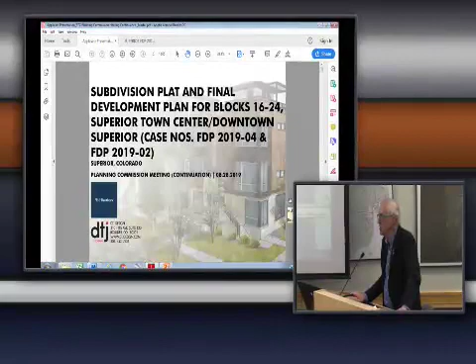Good evening, thank you for having us back again this week. Dave Williams, Principal of DTJ Design, 3101 Iris in Boulder. As Stephen said, we got together last week and had a very productive work session to address the various outstanding items, questions, and issues that you all had identified in the last meeting. I believe Stephen's memo did a really good job of summarizing everything, but I did want to run through things relatively quickly here.

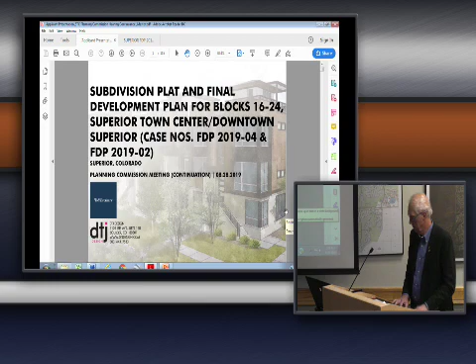So the first—and we're not advancing. I may need your mouse.

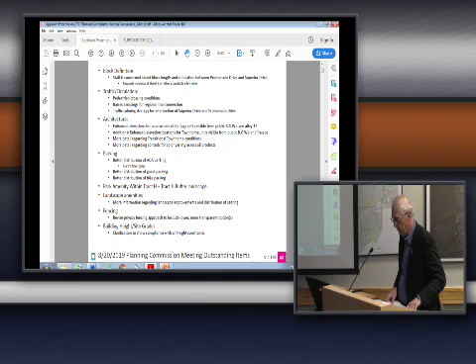We had this in here mainly just to remember what all those various topics were. Won't need to read all of this because it's basically the same information that Stephen has in his memo.

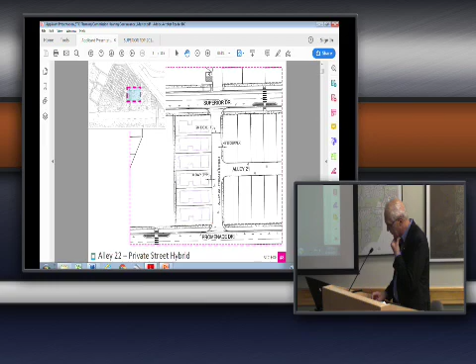We wanted to show graphically some of the things we agreed on. We had a good conversation regarding how to handle the block length and came up with a hybrid solution for Alley 22, creating a private street there. The width of the alley remains the same at 26 feet, which is actually a little wider than the travel surfaces of the roadways nearby.

We've added a 5-foot sidewalk on the east side of that private drive or private street. We've also increased the setback along the driveways for the garages to 8 feet, up from 5 feet previously, which provides a bit more visibility for cars backing out onto the new private street.

In net effect, that shifts the whole row of lots west about 8 feet, between the 5 feet of sidewalk and an additional 3 feet in the rears. That allowed us to maintain a healthy open space area while also creating a navigable and safe street along that edge.

The next thing was pedestrian crossings of the various streets. We settled on raised pavers, or raised crosswalks with pavers, generally along the multi-use trail through here—one at Superior, one at Promenade, and one in the alley to help keep cars from traveling too fast.

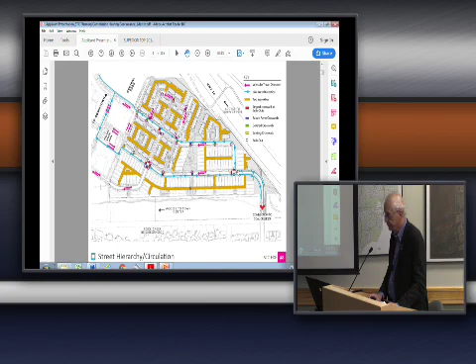The grading and dimensions there just didn't work out well to add another walk in that area, so by going to a dismount zone, we think that will help alleviate potential issues there. We also wanted to mention that—

I'll get to this intersection down here at Promenade and Superior, which was a big topic of conversation. We got to a pretty good solution working within the rights of way of Promenade and Superior—you can see this sketch off to the left. By having this bulb-out, as well as introducing these islands, it forces cars to slowly move through and make deliberate moves for through or turn movements, without impacting bicycle traffic much. We think this is a really good strategy for slowing down traffic at that intersection.

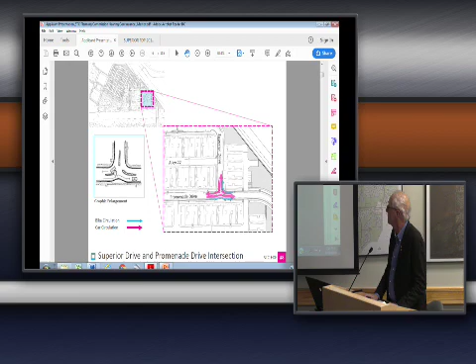Then there was a comment about not relying exclusively on bike lanes for bicycle traffic. So on Promenade and on Superior, we worked with staff to get creative with the widths of each of these various lanes without changing the right-of-way.

On the west end of Promenade, we went to a narrower bike lane, going from 7 feet down to 6 feet, and a narrower landscape tree lawn from 8 feet down to 7 feet, adding that into the walk. So now we've got a 7-foot walk there as opposed to a 5-foot walk, which we think will be better for kids and tricycles and families with all their various appurtenances on those two major east-west thoroughfares.

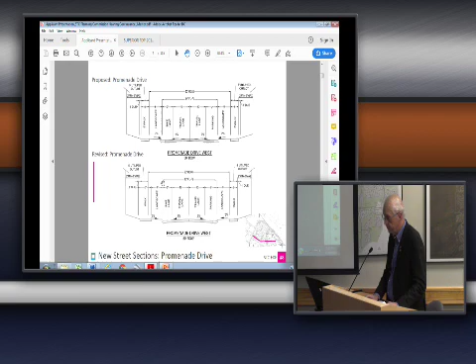But I also want to remind you that we still have the trail in Tract H that will provide good east-west connectivity as well, the same section on Superior Drive, just on the opposite side of the street.

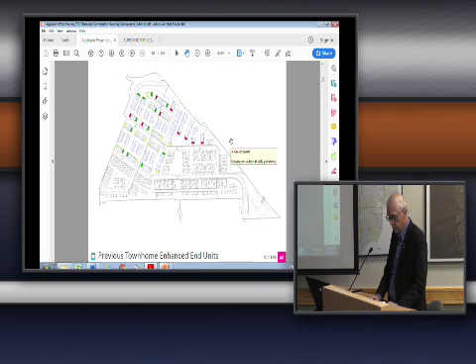Staff also asked that we look at some additional locations for enhanced elevations on the townhomes. This is what we had in the original application, and then we've added some, primarily in places where along streets you can see the ends of those buildings, such as here, then through here, and in this area right in through here.

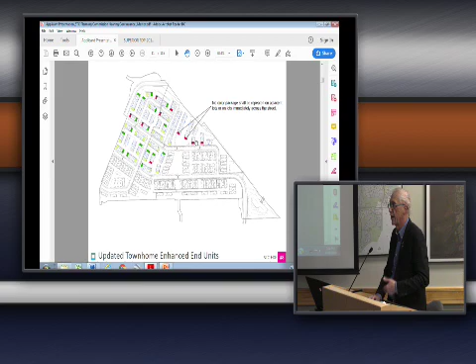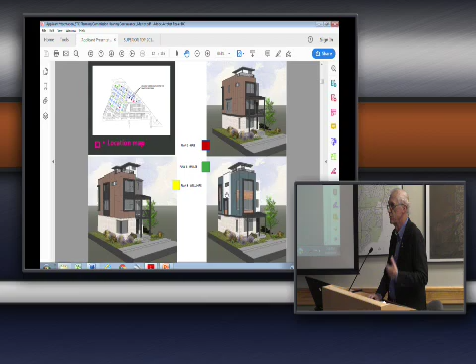There was also a comment from you all about what these would look like. They're all colored red—that's a symbol that they're the same unit. What we're going to do is condition those so they can't have the same color scheme adjacent to each other, which will provide some additional variety. Keep in mind the enhancements include pop-outs, additional windows, these bracketed fins, and a variety of materiality that's more dynamic than on the standard elevations. So between the color and these additional enhancements, we think we've done a pretty good job of dealing with that particular topic.

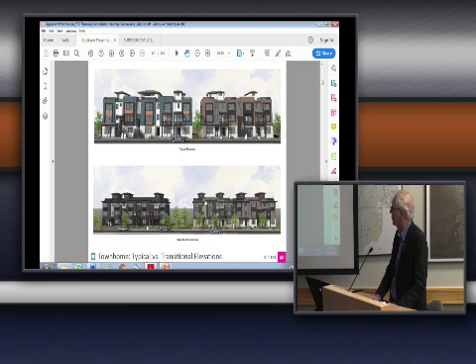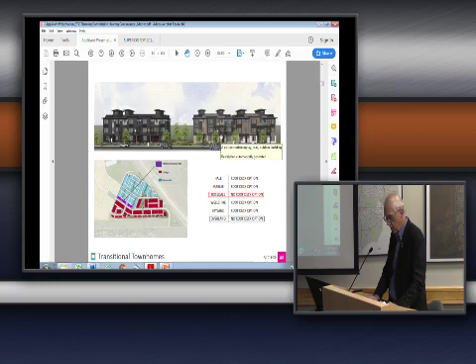The transitional townhomes right along Promenade, as we talked about last time—these are the standard ones, and these are the transitional ones. We only have 2 building types there, a 5-plex and a couple of 3-plexes, and we'll be limiting the number of roof decks that might be optioned. Keep in mind these will be options, so they aren't going to automatically be there; in some cases the home buyer may not choose to put that in. But say in the 5-plex there'll be no more than 3 roof decks, and in the 2 3-plexes there'll be no more than 2 in each one of those. And again, they may not all be selected.

Then there was a question about maintaining diversity of the cottages. This is the language we're going to include: no building model shall be repeated on more than 2 adjacent lots, and they have to be an alternative elevation style and color package. No color packages will be repeated on adjacent lots or lots immediately across the street. In addition, a minimum of 10% of each of the 3 elevation styles that we're promoting will be included.

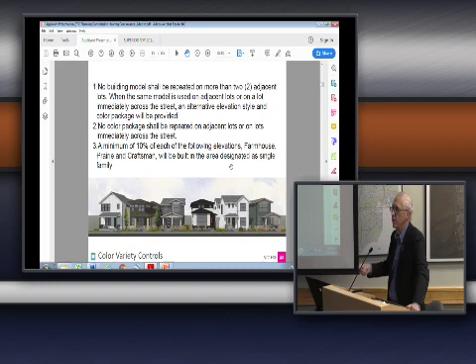One thing I want to make sure I'm clear about, because we didn't show it in our illustrations, is that the various color schemes used for all these cottages apply to all of the different elevation styles. So even though we may have drawn the farmhouses as white, there are color schemes that go along with those as well—we just didn't include those in the package that you saw.

Parking—we think we've got parking really, really well covered. We well exceed the minimum requirements. The parking chart is a little difficult to understand because we took the worst case scenario and assumed every cottage would be a 3-car garage, which isn't really the case; there'll be a mix of 2- and 3-car garages. But if it were all 3-car garages, the minimum required off-street parking would be 701 spaces total, and we're providing 748. In addition, there are 176 on-street parking spaces, totaling 924. That number will come down a bit when we have 2-car garages instead of 3-car garages.

More importantly, we addressed staff's concern about additional handicap parking spaces, and I wanted to show you where those are located. We've tried to be strategic about distributing them well throughout the site. So we have 2 up in this corner, adding an accessible walk to provide access to generally this part of the neighborhood.

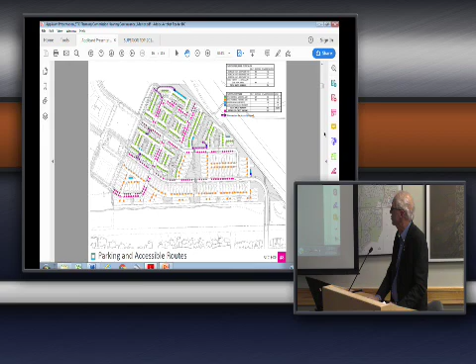We're adding one here, which serves this part of the neighborhood, but it's also close to a crossing so that if people need to get across the other side, that's easily done. And then another one over here, same kind of thing. And then we still have the one that was here and the one here. So we've gone from 2 to 6. 2 is what's required, so anything over 2 is above the minimum requirements. We feel pretty good about the parking strategy for this neighborhood.

There was discussion about whether we had adequate bicycle parking or not. In our original submittal, we had those focused on our central open space here. But in addition to that, now we've also included one here, one here, one here, and one here. So generally in these other open space elements throughout the neighborhood, someone who happens to ride their bike will find something in one of those open space elements in each part of the neighborhood.

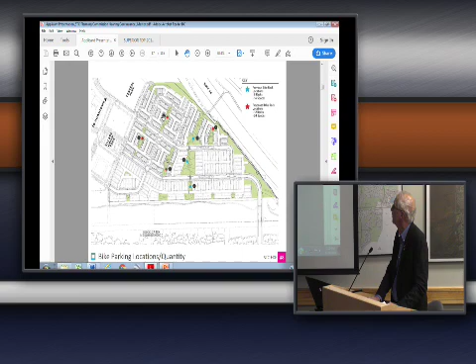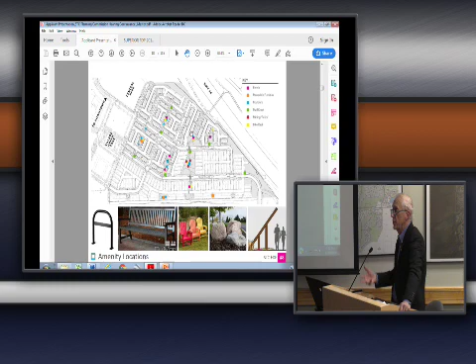There was also a question about various kinds of other amenities. We talked a lot about our central play art structure piece that we'll work with the arts groups on. But in addition to that, we have mail kiosks for each sub-neighborhood, the bike racks we talked about, boulders throughout, and often these open spaces incorporate little informal play locations. We're including benches in a variety of locations, as well as movable seating throughout the neighborhood. So we feel like we've got a pretty good distribution of street furniture and other amenities throughout the neighborhood.

Fencing was a topic, as well as how to handle the headlights of cars coming in to park in these garages at the south edge. So we modified our fencing strategy a little bit, still keeping the existing PVC fence along Tract H. We're going to come off those perpendicular at each of these lots that have their side facing Tract H with a wood version of the rail fence at a 90-degree angle. And then in those spaces where the driveway comes in, we'll be placing a berm of a minimum height of 3 feet, so that any headlights coming in will be blocked by that berm. We felt a berm was a more permanent solution than a fence, wall, or landscape, because landscape can die and people are unlikely to modify the grade in that area. So each one of these will have a berm to assist with that particular element.

We also spent a lot of time working with staff on the privacy fencing for the cottages, and I'm going to get into that here. What we've done is, in all cases, it's pulled back a minimum of 3 feet from the front and rear corners, and between units. In some cases they'll be further back because of the way the wraparound porches work, so there'll be some variety along the street in terms of location. That's also the case on the ends — they'll be pulled back 3 feet from the ends. And what we've got is that the fence occurring in these short sections is roughly 15% transparent, so they're not fully solid.

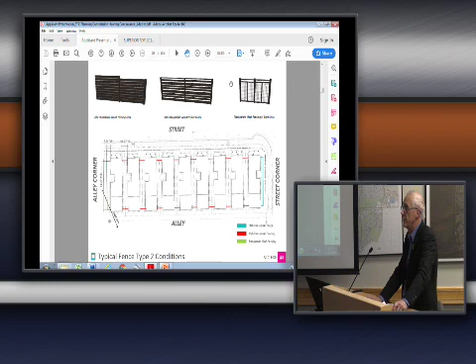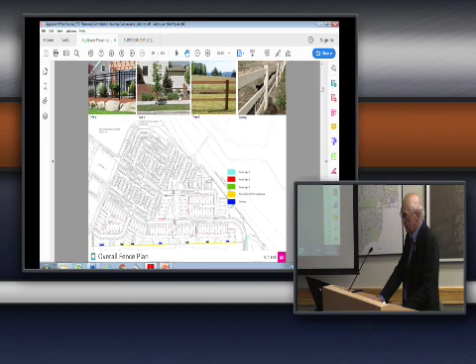The ones on the ends will be at least 30% transparent. However, in places like where we have an alley intersection with some sightline questions, we'll go to a more transparent mesh solution. That photograph is from Midtown over in Adams County, which had a similar condition where we needed to make sure people coming up to that intersection could see through. So I think we're all pretty comfortable with that. 5 feet is the maximum height, so we think we've got that one pretty well addressed as well.

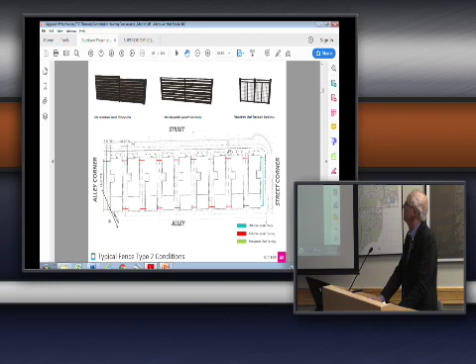This is just an illustration of how that berm strategy might work, and how the other rail fence will just tee directly into the existing fence.

Then we've got the question about the view sensitivity area. We've studied that long and hard with the criteria as we understand it. Each of these numbers represents the allowed height relative to the finished grade for each of those. You'll see they range anywhere from 27.5 feet up to 39 feet or so. We have a 32-foot height limitation, so pretty quickly after we get out of this area, we don't really have much of an issue there.

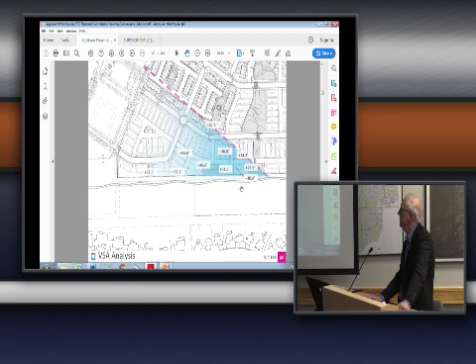We do have a need to restrict certain floor plans and certain models on certain lots, particularly lot 46, the one that you specifically called out last time, to make sure that we are in compliance with the view sensitivity area plane. In addition, there will be conditions on those lots so that people who purchase those homes won't be able to modify them to violate the view sensitivity area either.

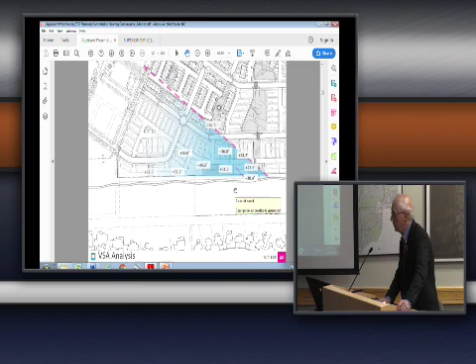The scenario that Stephen pointed out in his memo is a good one, where somebody might want to add a second floor over a place where there wasn't one. If that violates the view sensitivity area plane, that wouldn't be allowed. So that will be something that runs with the land on those particular lots.

We went through a variety of analysis and shared all of that information with Chase. I suppose you probably have a desire to see his analysis as well, and we're happy to talk about that further if needed. So that's what I've got for tonight. I think we hit all of the topics, unless you have some that I missed.

Anybody have any questions for Alex before we move a little bit? Not questions, not at this time. Okay, all right, cool, thank you very much.

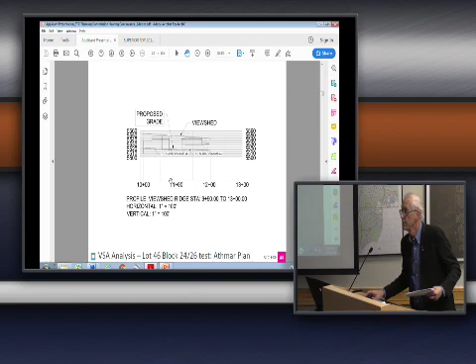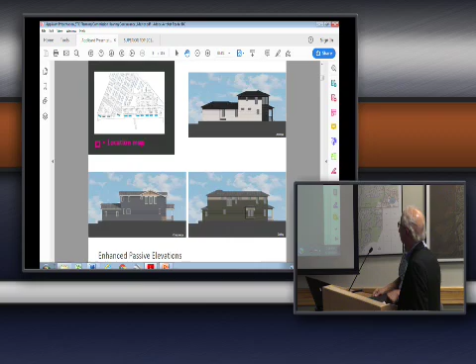I'd like, Alex, would you mind, could I pick on you to come up? I know there's 3 areas that we're all interested in just understanding as best we can. That's the intersection at Superior Drive and Promenade, the alley that they put in place to help reduce the stretch between Superior Drive and what was it, Discovery Parkway.

Well, start with those 2, I'll think of the other one in a minute. Sure. So, Promenade Drive, Alex Arnolo, Public Works Director.

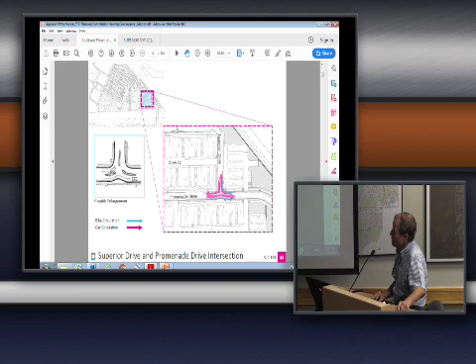We wanted to cut down on the long, uninterrupted, straight stretch of roadway. So this was a key intersection where I wanted to do some additional traffic calming, and I think this will probably end up as a 3-way stop. It's a more natural 3-way stop as Promenade comes up and tees into Superior Drive. We want a natural stop condition rather than a T stop condition where the head of the T just keeps flying through there.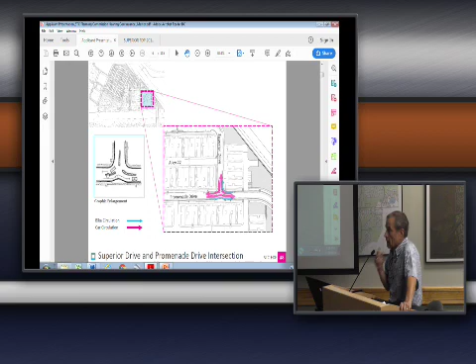We've talked about putting some islands in there to also slow traffic down as it goes through. Is this similar? I just finally thought of one I saw - on 55th in Boulder, as you're getting closer to Cherryvale, there's a residential street that comes in. Yes, on Cherry, it's on Cherryvale. That just came to mind.

Are you thinking similar to that? Yes. So will it be a 3-way stop? Yes, it could be. Is it proposed as a 3-way stop right now? Right now, it's not. We built one of these similar in Charlotte, but it wasn't a 3-way stop.

My takeaway was that I would never, ever put a bike lane as part of the traffic calming again, because as a cyclist, you feel like you're being shunted out into the lane as cars are kind of cutting across the bike lane because they've got that extra 6 feet of width to work with. So I would really like that to be a 3-way stop. Yeah, so let's make sure we get that in there.

I drive through one in Boulder on 26th Street. There are 2 intersections like this. They're both 3-way stops, and normally the bike lanes merge with traffic and go through with the vehicles, and have a stop condition. So I don't have any problem with a stop condition at this point. Okay.

One more question, Alex, sorry. It was a comment - I'd like to second Commissioner Miller's point, because I ride up and down Cherryvale quite frequently, and when I get to the area that looks like that, I take to the sidewalk rather than stay on the road. Okay, thank you.

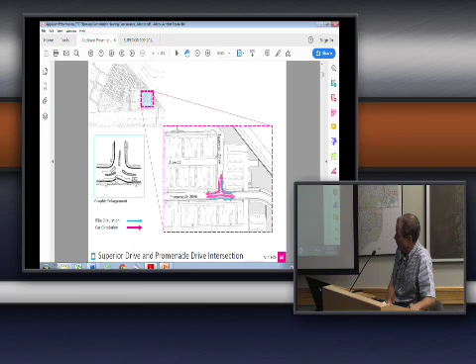Oh, my other one, Alex, was the Coal Creek was... Am I going the wrong way? Yeah. Oh.

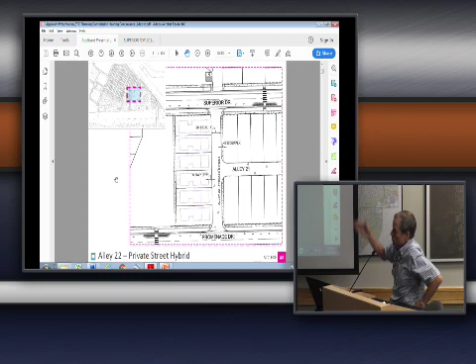So we had a long discussion on this one and threw around a lot of ideas. What we were trying to reconcile was the fact that there's no cross streets, no other connections between Promenade and Superior for 1,500 feet or so. So we felt this street could end up with some additional traffic just because people would be going around. And remember, we have parking on just one side of the street, so you may want to circle back so you can park on the right side of the street. So we just felt naturally this street could end up with more traffic than other alleys around.

So we wanted to give some additional buffering to these homes, because most of the time when you're on the alley, your garage is 6 feet, maybe less than 5 feet from the alley. So alleys are meant to be slow moving, but this could get some additional traffic you wouldn't normally see on other alleys. So we wanted to give additional buffering. That created additional setbacks here, and also provided some additional area for a sidewalk. This will be more of a street situation with ADA ramps and provide a pedestrian connection through that alley area. So it was kind of a compromise between an alley.

We're going to call it a private street. We don't want to maintain it, but it may function like a street, so it will be called a private street. Is it a raised crossing?

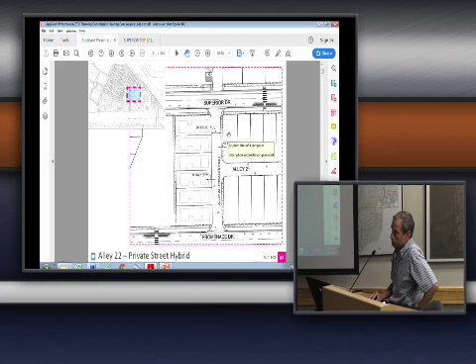So what makes it look like— the point of this is that you're coming down Promenade, and it's got to be clear you're coming up on an intersection, right? That's the whole idea, to slow people down. What makes that intersection look more like an intersection? We decided this would be more like an intersection rather than an alley. Yeah, we've removed the commercial.

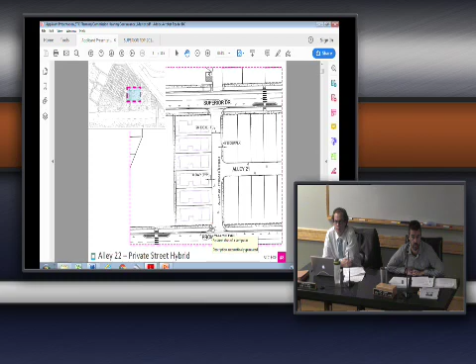Okay, there's no crosswalk changes? Not in that location. Not in that location, right. In the bottom left corner you'll see—that's where the raised crosswalk will be. So we have that in addition, so it'll slow traffic for people moving eastbound before you get to this intersection, and for people moving westbound, it'll just be a right turn after it. Exactly. We'll have a mid-block crossing here and a raised crossing right where the key map's at.

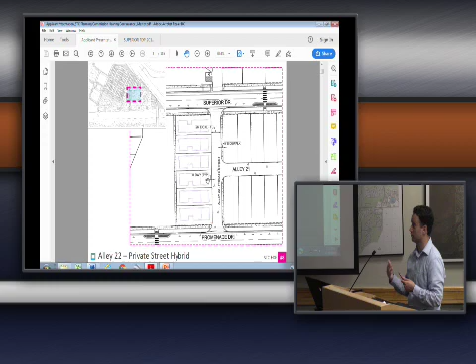Okay, yes, go ahead. Does this mean that people are going to be driving up and down that street at the same time as other people coming in and out of their garages? That was the purpose of extending the driveway from the 5-foot typical we have elsewhere to 8 feet, to give a little bit more visual when you're looking down the alleyway. You'll see somebody backing out and have an opportunity to slow down. The same with people backing out of their garage—they'll have an opportunity to see any traffic in the alleyway.

I'm not confident that that's a good solution. All right, thank you.

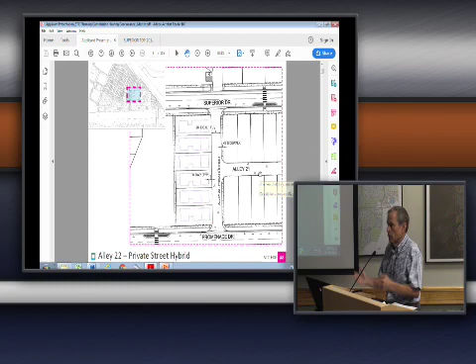In terms of Coal Creek, again, we gave you a little analysis last week about the volumes of traffic that would be expected on Coal Creek Drive if this connection is made, if it's made to 88th. We gave you some traffic numbers—I think it's like 3,000 if Promenade goes to 88th, and about 3,800 if it goes south into Coal Creek Drive. Those numbers may be a little high. Stephen presented some counts of units that have been coming in. If you remember, we have 1,400 dwelling units, and it looks like it may be 1,000 or so. So the traffic count projections we made were for the full 1,400, so there could be some drop in the projections I gave you last week. Okay, thank you. Do you have a question, Vince?

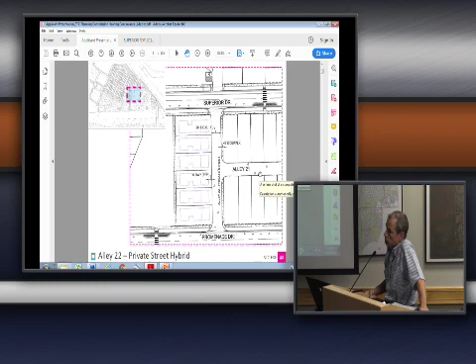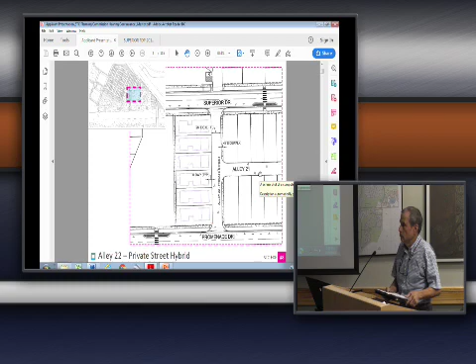I don't know if this is for you or the developer, but I'm looking at the trails and circulation map and the dismount zones. Made me a little curious. Why do we have to call those dismount zones? Are they practically going to be used as dismount zones, or is that just a sign that's there for legal reasons, but bicyclists will probably ignore it, which suggests a terrible design. I'd just like to know more about why we're doing these dismount zones.

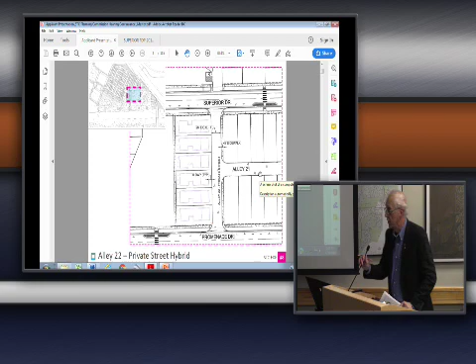The concern that was brought up last week was with the multi-use trail also serving as the front sidewalk for a series of units on both sides of it. Even though it's 10 feet wide as opposed to 5 feet wide, they're concerned that there might be potential for conflicts between people coming out of their residence and people using the multi-use trail. So by at least attempting to get people to dismount, that would reduce those potential conflicts.

Okay. Any other questions for Alex? I guess, Alex, what is your opinion on that? Do you feel like that's effective? And then, when I looked at that, I was looking at it as a pretty strong connection up to the bikeway for this neighborhood. Do you feel like most people are going to use on-street to get to the bikeway?

This is the concern we had right in this area here, because on both sides you're coming out your back door, your front door, right into the trail, and we had concern. Why don't you put it down the center and make a better connection for bicyclists? That was our concern. Put it down the center, but apparently there's some grade issues there that prevent them, and maybe a civil engineer can provide some additional information. But we were concerned that you have your front door and you walk out into a bike facility. So it's not a great situation, and that's what their suggestion is.

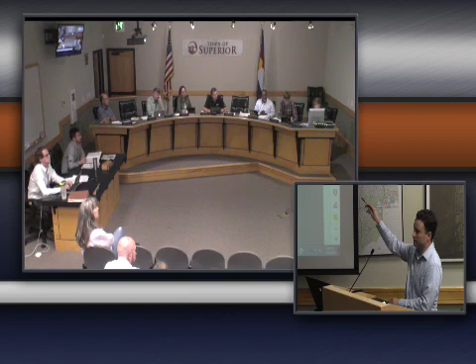Yeah, we could work around the grading issue. I think the intent was not to have 3 separate concrete ways going down that, and keeping it more green space, more open space. The connection that we have, though, is at the pedestrian bridge. I feel like that makes the most sense, and not having to route people down an alley—I think that would totally take away from the whole concept we have with the pedestrian bike trail, north and south.

I think if you make people get off their bikes, they're going to ride on a street or an alley instead. So we should give them a connection, or they'll ignore the sign. And there wouldn't really be a passageway from the alley over to the purple trail there—that would be a landscaped area. Due to grades, could you not feasibly put a connection through there? You would be going on maybe a 5-to-1 slope through there.

Okay, over to 7th, over to Street 7, you mean? Yeah, I'm not sure what street it is. That's Street 7, yeah, so the grade is... Street 7. You're suggesting somebody would come up and over, or come up the alley and then over? Uh-huh, the portion right here wouldn't be great for biking, just the natural condition of it.

Okay. I guess I'd just urge you to continue looking at that, because I think there's some opportunities to make that better, if that really is a north-south connection to the bikeway.

Are there any other questions for staff, the developer, or Alex before I take public comments? The next step will be public comment, and then the developer will have a chance to respond.

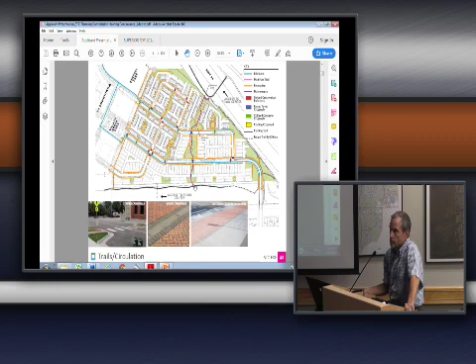I think we have a similar situation along the edge of Founders Park just down the road, where we allow street parking beside the park—it's essentially the same situation you have here. There are way more homes here than at Founders Park, but there's a lot of similarity; people use the park and park along the edge in a designated parking area.

Okay, any other questions?

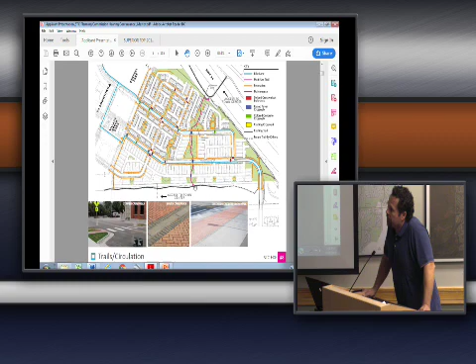Because I know if I was sitting in your chairs, and through my planning efforts kids were getting hit or hurt by cars zinging by, or any pedestrian was hit, I wouldn't want that blood on my hands either. So I would strongly encourage you to think about the neighborhood and the impact that car density is going to have on those people as well. So my vote is for a bike path. Thank you very much.

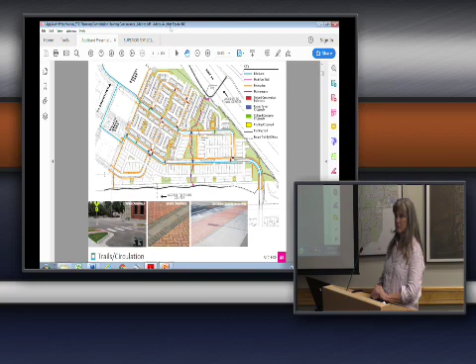Okay, so that's Lanterns, correct? Correct. All right, and so the new development is just right up that way? Coal Creek right here. So okay, there's Coal Creek, and the connections.

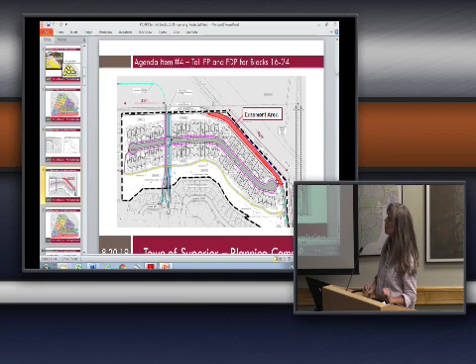And wasn't the plan that something was going to connect the town to 88th alongside 36? The Lanterns development built Coal Creek Crossing to the north property line for that connection, and then we reserved right of way where this easement area is indicated in red. But none of that got built. So all Lanterns built was what they were required for their development, which was an EVA.

From this cul-de-sac south. Okay, so like I said, I apologize for showing up late, but is there any reason why it can't be built out, the red road, instead of connecting through to Coal Creek and going through the neighborhoods that have existed with, like you said, cul-de-sacs and school crossings? And looks like it's a 4-lane, but now it's been built down to a 2-lane, which is good. And you want all those vehicles going through? So I just don't understand why that can't be developed the way that the last time I talked at the Weldona Way meetings is that's the way it was going to go.

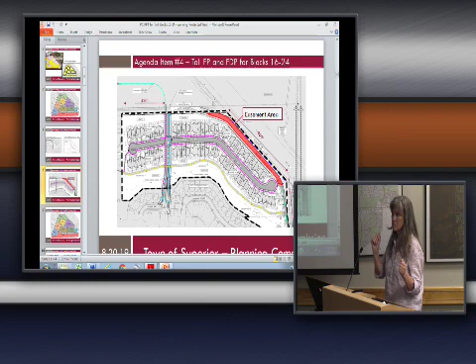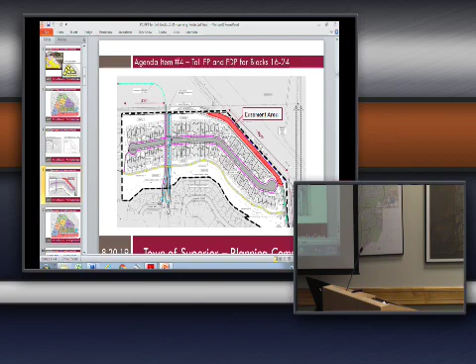Paul Amirowitz, 967 East Carville Place. Thanks so much. I know you guys have an incredibly hard job. My wife was on the board for 2 terms and went through a lot of this stuff. She would come home at night and I'd say, is it really worth the $10 you get paid a month to get yelled at all the time? Not really worth it. So I really appreciate that. And I appreciate you agreeing to build berms at the ends of the alleys.

That's one of the things I wanted to bring up to try to mitigate some of the light situations on the alleys coming into the Carville Place areas. The primary thing I really want to talk about is the view-sensitive area. I'm really not 100% sure from looking at the diagrams here and from reading the original annexation agreement, which we had a lot to do with honestly, that that's being interpreted correctly.

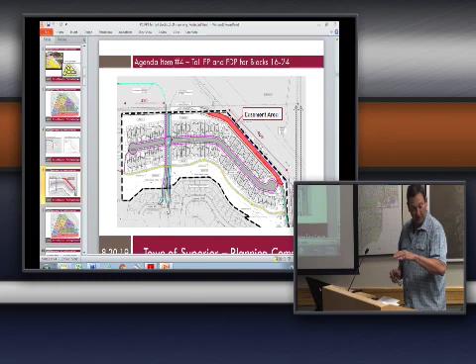I think when you read the documents, and I'm happy to read from them if you want to, I think you've probably read them over and over again, that the view-sensitive area states that anywhere along the south boundary line outwards towards the north, there will be a 4% grade over a 10-foot raise. And the last time we were here, this gentleman mentioned, oh, we're gonna cut that hill off by 20 feet. Now, I don't know if it's 20 feet, 30 feet, or 45 feet, I don't know what that footage is.

But until we really see the gradient of what that looks like, of how you're gonna actually grade that down, I can't say that I can agree with how you're doing the view-sensitive area. Because what this looks like is somebody took a plane and a slice of pie and said, we're going to go from here to here, and that's the view-sensitive area. However, in the original annexation agreement, I'm happy to read it if you want me to. I don't think you need me to do it again. That's not the way it's stated at all.

So that's my number one consideration, is looking at that and being sure that the town, if you guys are abiding by the annexation agreement. Is that a bad assumption? Is everybody agreed to abide by the annexation agreement that was put into place in 1988, which we worked really hard to get done? I don't hear a yes. I don't hear a no. Are we agreeing to abide by the annexation agreement that was put into place in 1988?

So, do you want to take a minute and just respond? I know it's tied to the PD. Yeah, I mean, this is kind of an issue that we had addressed to the commission in one of our memos.

In terms of... It's a very easy question, a yes or no question. So obviously the annexation agreement is... it's a yes or no question, Paul. You need to allow him to answer, please, or I'll have to ask you to sit down.

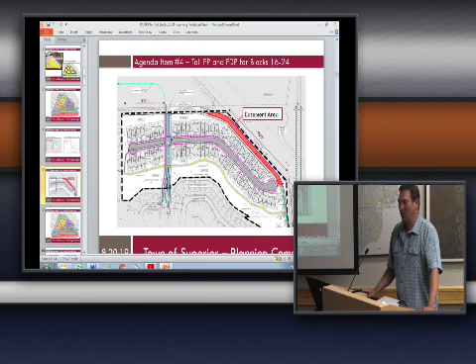Right, okay. So the annexation agreement obviously informs this application. There was also later a PD amendment that would also inform the commission's decision. Where the PD amendment would apply, the commission would look to that. Where it otherwise doesn't supersede the annexation agreement, you would look to the annexation agreement.

Any other analysis concerning the view-sensitive area, I would just refer the commission to our memo that we sent on that. Is that memo public? Can we see that memo? No, that's a confidential legal memo.

Oh, of course. So my other question is, if there was an amendment put in place around a view-sensitive area that said this is the way we're going to measure that area, and we've chosen maybe not to measure that area, does that open up the town to any kind of... never mind, I won't go down that path.

So anyway, that was everything. And then many people actually purchased their homes along those areas, understanding that there was an annexation agreement in place, and that annexation agreement was going to promise them a certain view-sensitive area. And other people early on bought property and paid a lot premium for those properties because of that ideal. So to go back on that is something that is just anathema to the way I like to do business.

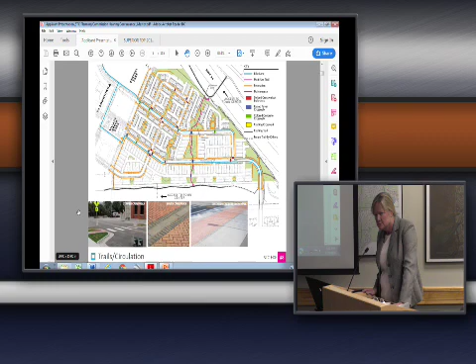Right. Okay. All right, thank you. I don't know if that answers your question, but our discussion needs to be with the attorney. I wanted to make sure we understood. So I sort of asked your question. That doesn't answer my question. It was kind of a yes or no. It's either going to be you're agreeing to interpret it as it's drawn in the FDP, or you're not. So that's one of the questions.

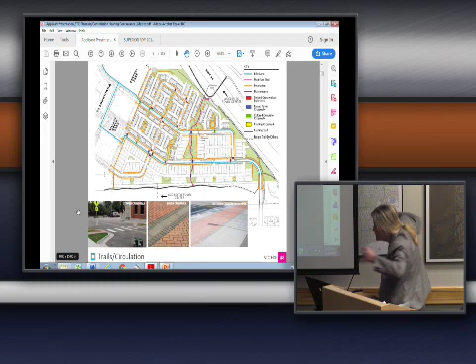The third thing I wanted to bring up is this piece here that says access to town center, with the arrow drawn next to it. That line is suspiciously close to the cul-de-sacs of East Wiggins and East Carville. There's been a petition circulated through the neighborhoods encompassing Waterford Estates, East Carville, Brandon, Wiley, and Carville and Pitkin, covering both ends of where that line cuts down the middle. Fully 80% of the residents signed the petition strongly opposing any trail connection between the cul-de-sacs of Carville and Pitkin. Is that part of this PD, Stephen? There's no connection. Well, this line is suspiciously drawn with an arrow to it. It's not part of this PD, so if it happens, it's not through this PD.

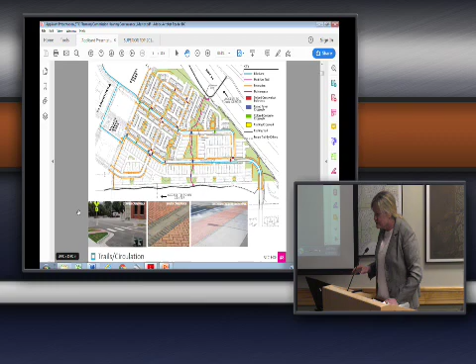Okay, so I talked about the VSA and no park. My personal feelings are that for you to honor anything that is not in the annexation agreement isn't just a betrayal of the people that put that together and fought well before we came along. We're standing on the shoulders of giants who made that agreement, but it's also a betrayal of the people who purchased their houses based on it.

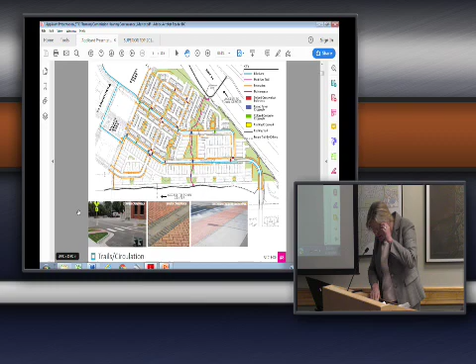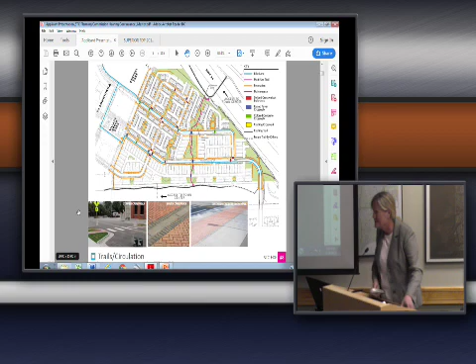And then finally, the Coal Creek connection. I did a little research on this and looked at Municipal Code 16-7-30. At the end of the code I'll let you guys read it all, but I'm just going to read a short statement: it says connection shall not be permitted where the effect would be to encourage the use of such streets by substantial through traffic. A Coal Creek connection, 3,800 cars, that's substantial through traffic, and it will orphan any of the neighborhoods on the east side of Coal Creek. So I thank you for your time, and I hope you will modify your opinions based on what your residents want. Thanks again.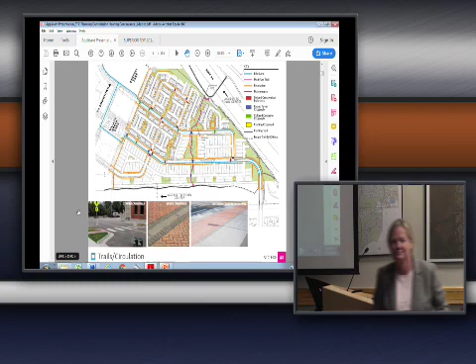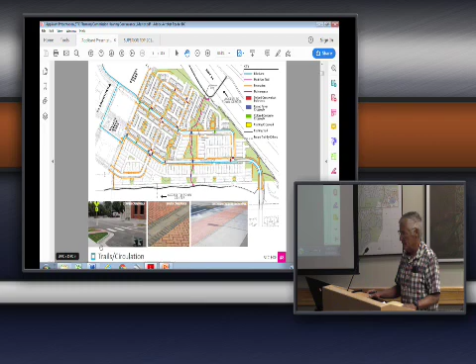Hello, I'm Joe Sorelli. I live on East Carville Place in Superior, immediately south of this development. I was a participant in the development of the annexation agreement, a participant on the Planning Commission for maybe 8 or 9 years, and on the town board for 9 years. So I've got some concerns about what I'm seeing here, and I'd like to echo a couple of points.

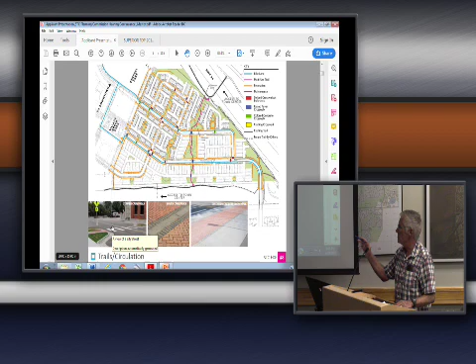First of all, what Mr. Mbirowitz said regarding the grading plan is extremely important, because we don't know what that is. But the view sensitive area from the annexation agreement, which the master developer assured the town at the time they were applying for approval of the first PD amendment, was that they would comply with the annexation agreement. The only area that I can remember where that got amended by PDA 3 was where the Coal Creek Drive connection cut in front of the pond, cutting into the area that we were supposed to have as protected. Since that time that apparently has changed, but I'm not sure anything in PDA 3 addressed the view sensitive area regarding heights, and I can't recite what PDA 3 says about that. But nothing, even building heights, should be interpreted as amending that PDA 3 if the building height were to exceed the view sensitive area.

That's my view. So I agree with my two preceding commenters regarding that, and I think it's important that this be enforced. And I might add, the view sensitive area, having been involved in it at the time, was proposed by the property owner seeking to be annexed, because there was such opposition to the annexation that there was a very good chance the property might not have been annexed. That was proposed by the property owner and the successive property owners.

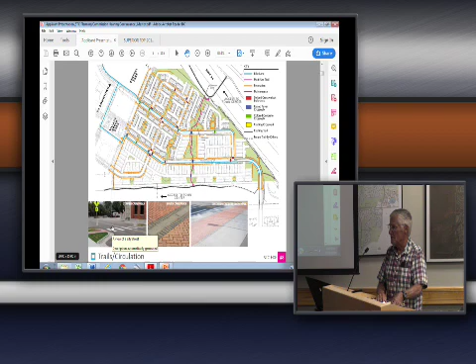I never, I can't resolve the diagram and the language, frankly. Everybody's concerned about the view of the mountains, primarily. But the language is clear that it's a 90-degree angle from the southern portion of each particular point you measure. So I always looked at Longs Peak as my point of view for where I'm looking for the view sensitive area. But then again, there's also sensitivity to each home along the way. Thank you. Okay.

Any other public comment? Yes.

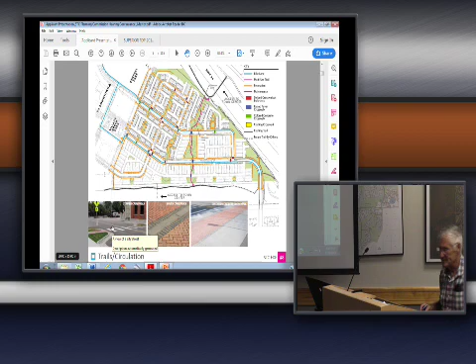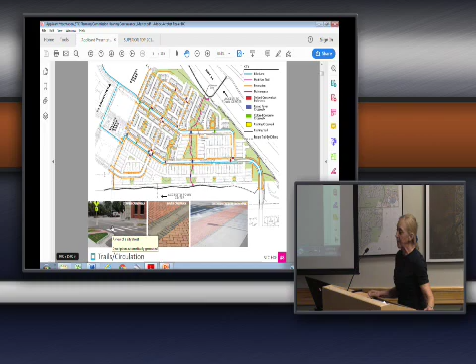My name is China Leonard. I live at 547 South Brandon Court. The things I wanted to speak about have basically been spoken by Mr. Umbirowitz, Teresa Clark, and Mr. Sorelli, but it's primarily focused on the visual corridor. I've lived in Rock Creek for 27 years, and that was a very important reason why we bought our property. We paid a prime price for where it is and for the view that we were supposed to have indefinitely. So I would just like to express my support for that.

I find it disturbing that original residents of Superior's interests seem to be going by the wayside and compromised by some of the new development. Thank you. Thank you.

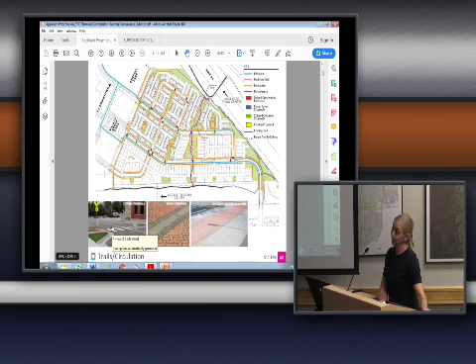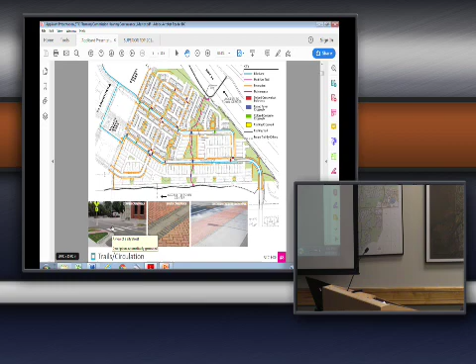Additional public comment? No? Okay, thank you. Does the applicant wish to respond to comments that were brought up? I can certainly respond to at least some of the comments here. I'm sorry, David Williams, DTJ Design, 3101 Iris, Boulder, Colorado.

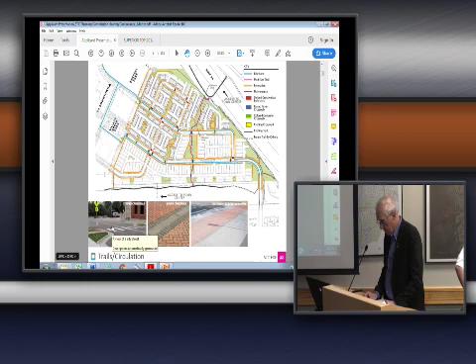First topic had to do with the bike path, where we're suggesting the dismount area. Certainly we're willing to explore some other alternatives if that becomes a big topic. I personally am not certain that the number of residents coming out of those compared to the number of bicyclists coming through there is going to be a huge conflict, but we're absolutely willing to take a look at another alternative. It just will likely mean less green space and more concrete by the time we're done. But we'll look at that.

I'm not going to address the Coal Creek connection because that's something we've been working with staff on in terms of how we're to address that, and we think we've accommodated whatever the town decides it's going to do with that area. As far as the comment regarding this note here - the note that says access to town center - that was intended to be associated with the path that runs through tract H. It wasn't pointing at that specific dashed line. In fact, I think that dashed line represents something else altogether.

It really was more just to represent that east-west connection in tract H was going to be a good opportunity for all residents. And then as far as the view-sensitive area, as I've mentioned before...

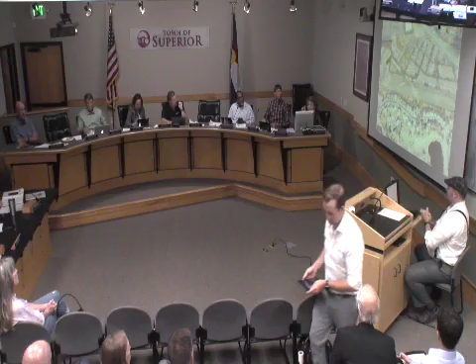Anybody want to see any different angles that Chase has not shown us yet? Okay, good. All right, we're done with Chase then too? Okay, I think we're good. Thank you very much, Chase. Appreciate you doing that.

So at this point, if we have questions for staff and somewhat to the developer, I can allow those to go, and then the next step would be to close the public hearing, continue our discussion, and decide how we're going to proceed.

So, questions? I have a question for staff. First of all, I appreciate your memo clearly saying here was the issue, here's what we've done, and then staff's response. I thought that was really helpful. And then you've also provided us a draft resolution. Can you confirm if the conditions in here, I didn't have a chance to read everyone closely, match - where you have no concern, does it match the application, but if you had concern, does it reflect staff's preference, or does this reflect what the applicant presented? Do you have additional concerns above and beyond what's in this resolution, I guess is what I'm asking. Oh, the only thing I guess we could potentially add, I think it's comprehensive of everything.

Okay, it was only done in the last 24 hours. Actually, this resolution was only done this afternoon.

I think it's comprehensive. If you guys notice anything... I broke these up. It would be cleaner if there were just 11 of them, but I think it reads easier when you separate them out.

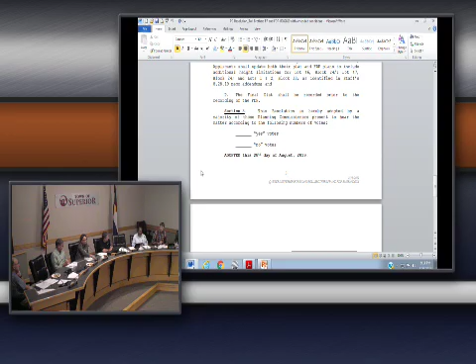All right, we have a motion by Commissioner Ritchie. Do we have a second? Seconded, second by Commissioner Miller. All in favor? We've got all but Commissioner Harper - that's a yay. And opposed? Commissioner Harper opposed. Okay, and that passes.